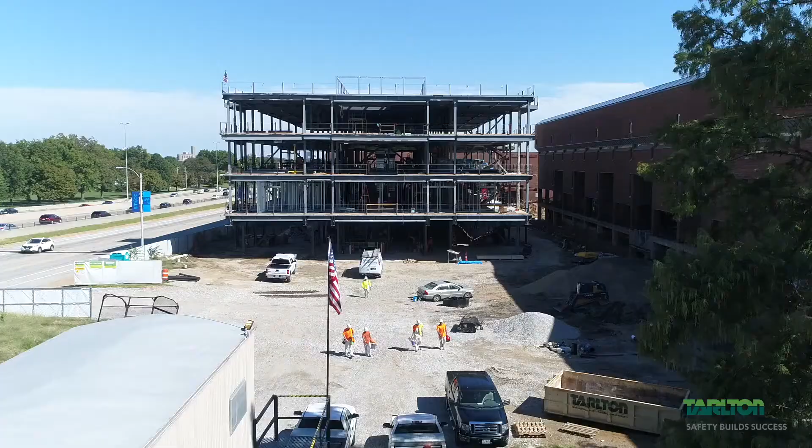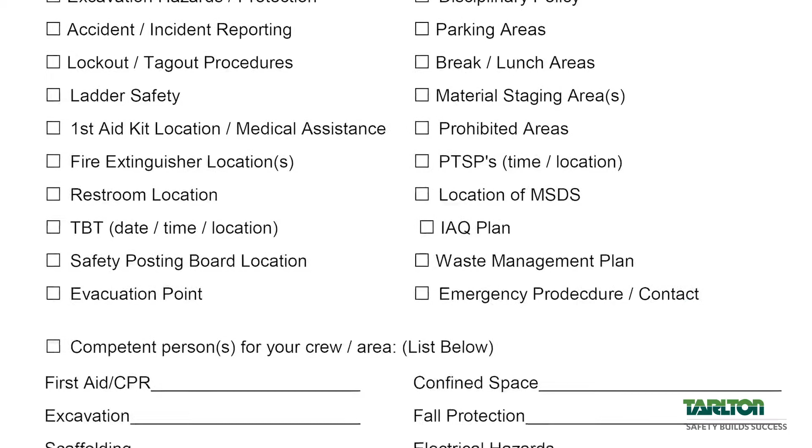Welcome to the St. Louis Zoo Primate Canopy Trails. Here at Tarlton, safety is our number one priority. We believe that everyone should go home the same way they came to work. Tarlton has put in place specific safety guidelines that everyone must follow at all times, which we believe will help us achieve this goal. Please follow along on the checklist and check the boxes as we go to acknowledge training and understanding of all topics. If you have any questions during the video, please ask the project superintendent or a member of the project team.

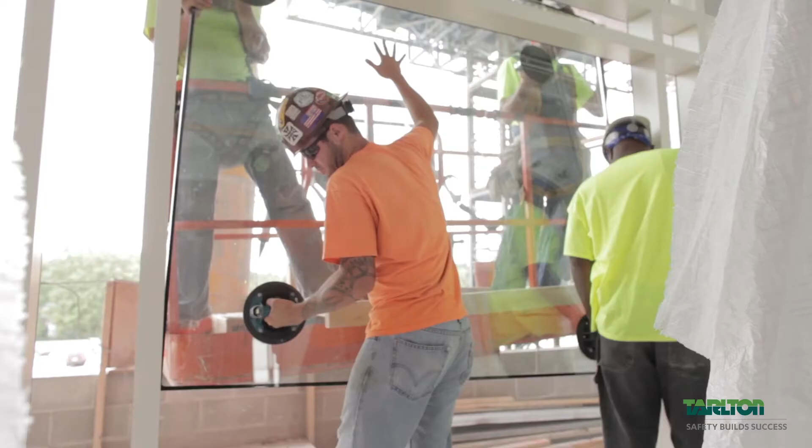All workers must be actively enrolled in the St. Louis Construction Consortium. Drug tests will be conducted for all incidents, at random, and for cause. Toolbox talks will be held Mondays at 12:30 p.m. sharp. All workers are required to attend.

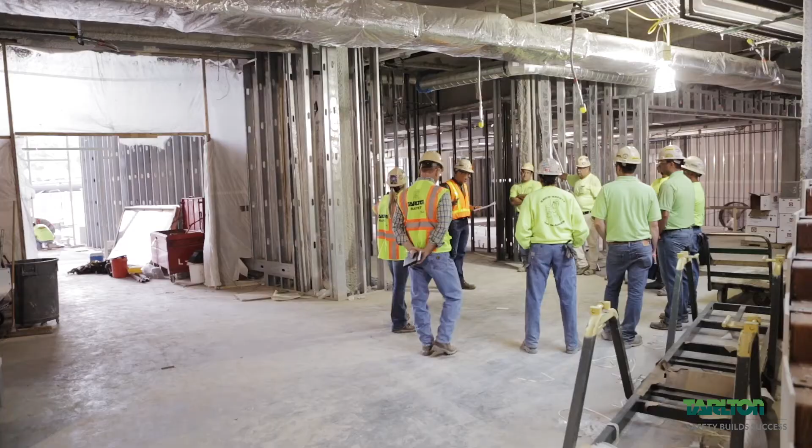All calls for the City of St. Louis Emergency Services will originate from the Zoo Rangers. Never call 911. All medical and fire emergency notifications should go through 314-781-0900, extension 2222.

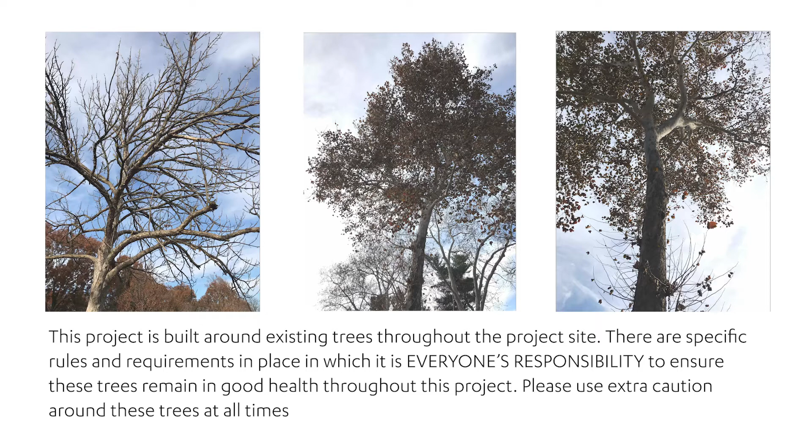This project is built around existing trees throughout the project site. There are specific rules and requirements in place in which it is everyone's responsibility to ensure these trees remain in good health throughout this project. Please use extra caution around these trees at all times.

All gates should be kept closed unless someone is actively monitoring them. This is a USDA federal requirement for animal containment purposes, and violations are strictly enforced.

Pictures for non-work purposes are not allowed in non-public areas. Any pictures for work that include animals or zoo staff taken from non-public areas, anywhere within the construction zone, primate house, behind the scenes, etc., must be cleared by a zoo representative and are not allowed to be posted on any social media platform. The nearest hospital is Barnes Jewish.

The nearest healthcare clinic is Concentra Midtown. The St. Louis Zoo is a tobacco-free campus, and no smoking or tobacco use is allowed on the property. Food or drink is to be contained to the designated break area appointed by the Tarlton Site Superintendent.

Tarlton's Site Superintendent is Jeff Peterson. He can be reached at 317-437-6643.

Temporary facilities will be available on the site. Use of existing facilities is not permitted. All trade and subcontractor parking is available on the east side of the south parking lot. Parking on the project site is not permitted. The evacuation point will be the south parking lot.

All deliveries must be coordinated with the Tarlton Superintendent at least 48 hours in advance. Space on site is limited, and any uncoordinated deliveries will be sent away.

Workers should immediately report unsafe conditions to their supervisor. No worker will be required or knowingly permitted to work in an unsafe area unless the work involved is to correct the hazard, and then only after all safety precautions are implemented.

Workers will always report fit for duty. Intoxicating beverages or narcotics are prohibited on the premises. Do not come to work under the influence of alcohol or drugs. Firearms or any type of explosive are not permitted on zoo grounds, including parking lots.

Fighting, horseplay, practical jokes, or unprofessional behavior will not be tolerated. Anyone found to be willingly damaging or defacing zoo property will be prosecuted. Threatening or abusive language directed at fellow employees, supervisors, zoo representatives, or zoo visitors is prohibited and grounds for removal from the property. Gambling on zoo property is prohibited.

Posting notices not approved by zoo officials is prohibited. Any and all discrimination or harassment will not be tolerated and will be cause for removal from zoo grounds. All incidents must be reported immediately to contractor management or zoo representatives. Theft of any nature or form is cause for immediate removal from zoo property and will result in prosecution.

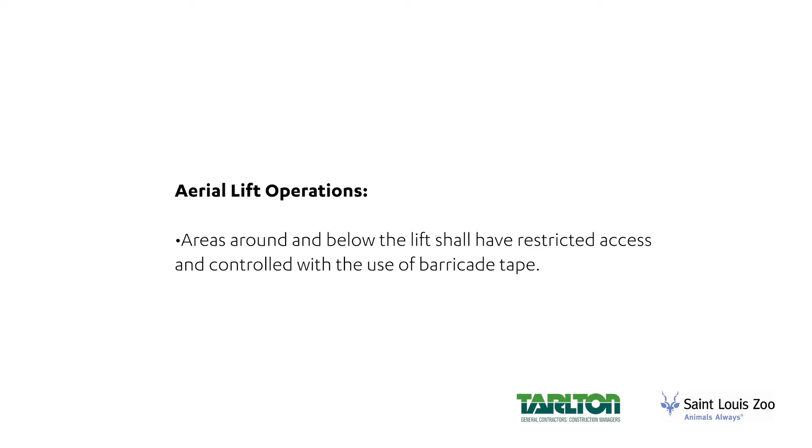The St. Louis Zoo has a specific contractor safety handbook in which all employees on site are expected to read and abide by. Aerial lift operations: areas around and below the lift shall have restricted access and controlled with the use of barricade tape. Fall protection: pits, trenches, and floor openings shall be barricaded with approved fencing and covers.

Fire protection: both the person conducting the flame or spark producing activity and the fire watches must have a fire extinguisher at the ready. Flagging off the area around and below the flame or spark producing operation is mandatory.

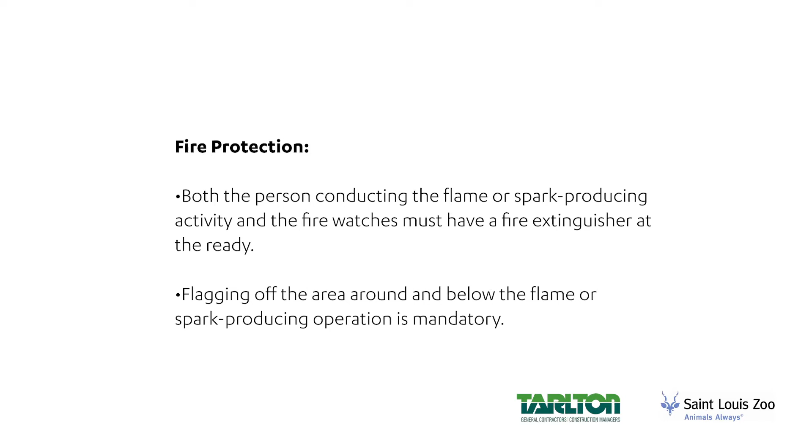Hazard communication. The contractor project management will maintain a current inventory of all materials. The safety data sheets will be maintained at the Tarlton site office. Subcontractors shall maintain a safety data sheet file for all hazardous materials they bring on site. Copies will be sent to the general contractor.

Operating equipment and vehicles. Your company must supply written training verification for all fork truck operations and aerial lifts. Overhead work. All overhead work must be flagged off, or a ground person will be stationed in the area of the overhead work.

Rigging. No load shall be moved above employees. A ground spotter must be used to notify employees in the path of the load. Sounding of a horn is not allowed.

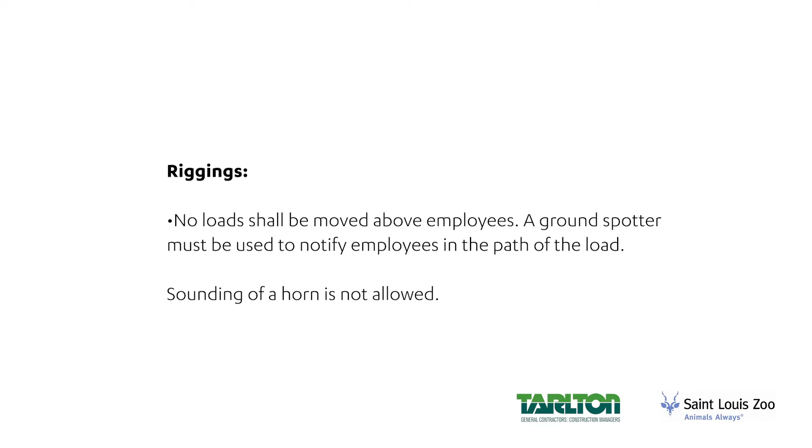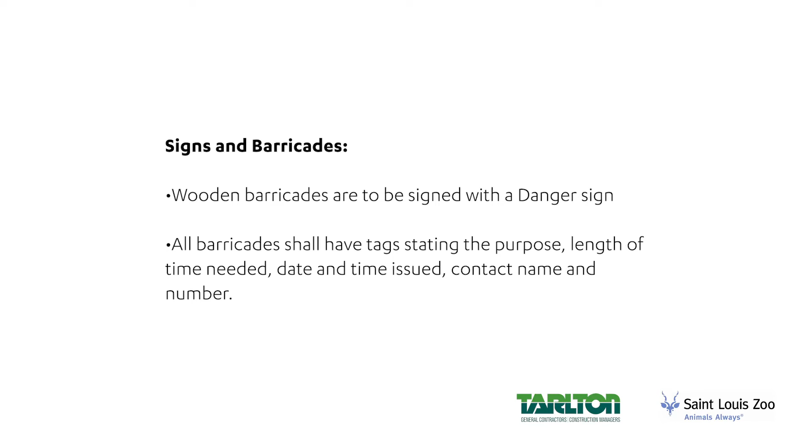Signs and barricades. Wooden barricades are to be signed with a danger sign. All barricades shall have tags stating the purpose, length of time needed, date and time issued, and contact name and phone number. Welding, cutting, burning, hot work permits. Welding at eye level shall be shielded to protect employees from welding arcs.

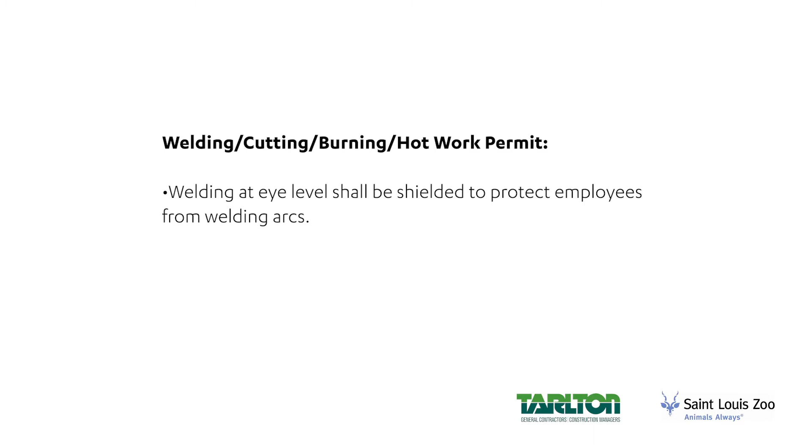Tarlton has a 100% PPE policy. The minimum PPE must be worn on site at all times. The minimum PPE is a hard hat, brim forward, safety glasses, high-vis outerwear, and sturdy work boots. Gloves are required when handling sharp or rough objects or any task that may result in a laceration. These are the minimum requirements, and additional PPE may be needed depending on the task.

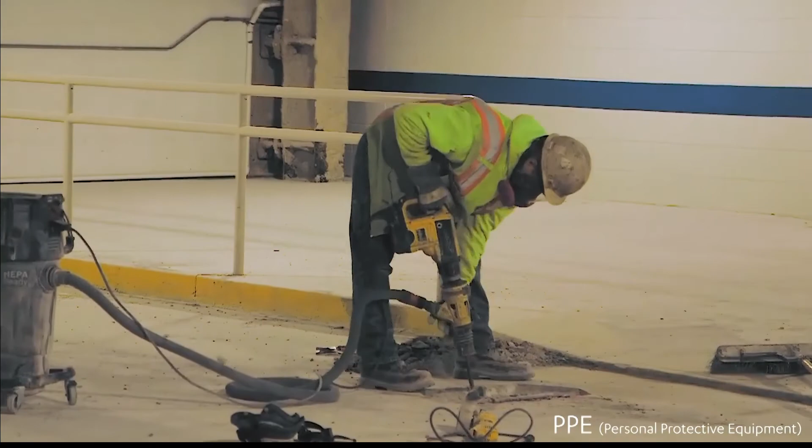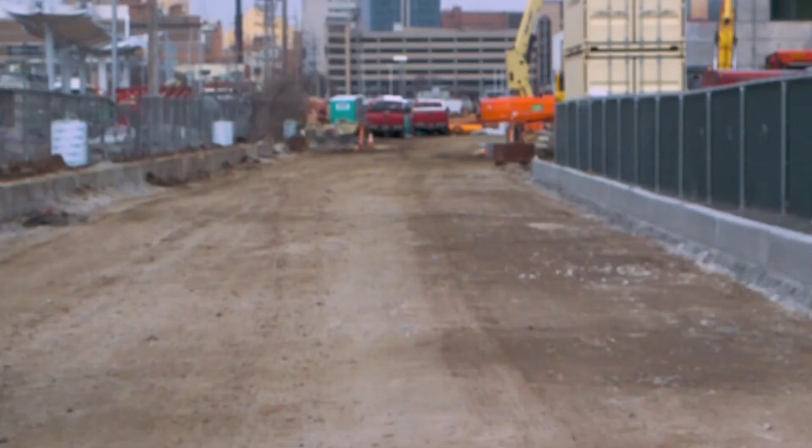Additional PPE may include face shields and/or goggles, hearing protection, plugs and/or muffs, respirators or self-contained breathing apparatus, gloves, reflective vests, Tyvek suits, rain suits, knee pads, metatarsal guards, fall protection, harnesses, and lanyards. Additional PPE required for work being performed will be identified on the daily PTSP.

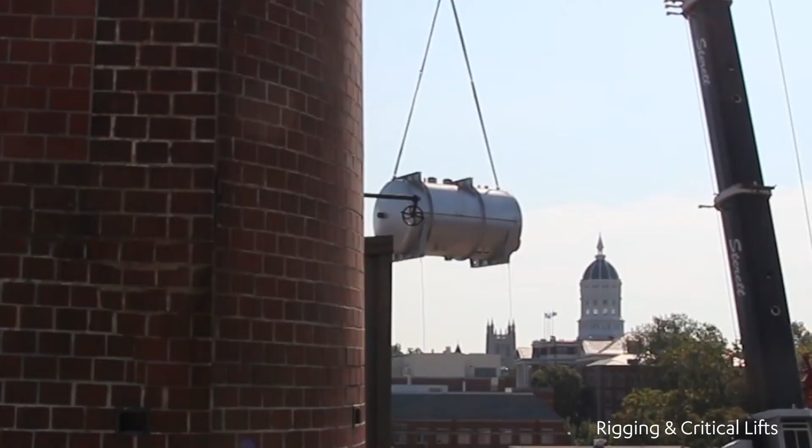Any employee or subcontractor engaged in a rigging activity on the job site must be a certified rigger. Also, any person signaling a crane must be a certified signal person. These employees must show proof of their certification. All weights of loads must be known before hoisting the material, and all rigging must be inspected before use.

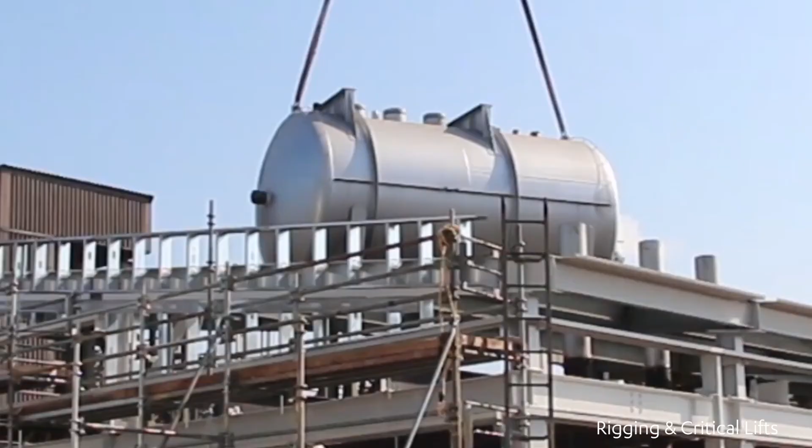If there is a critical lift on site, a critical lift permit must be completed and a critical lift meeting conducted before the lift is made.

All subcontractors must provide a competent person or foreman with minimum OSHA 30 certification on site at all times. All crews must complete a job safety analysis, job safety and health analysis, or pre-task safety plan before each day of work begins. If your company does not have a system, Tarlton will supply a subcontractor pre-task safety plan form for your crew to complete every day.

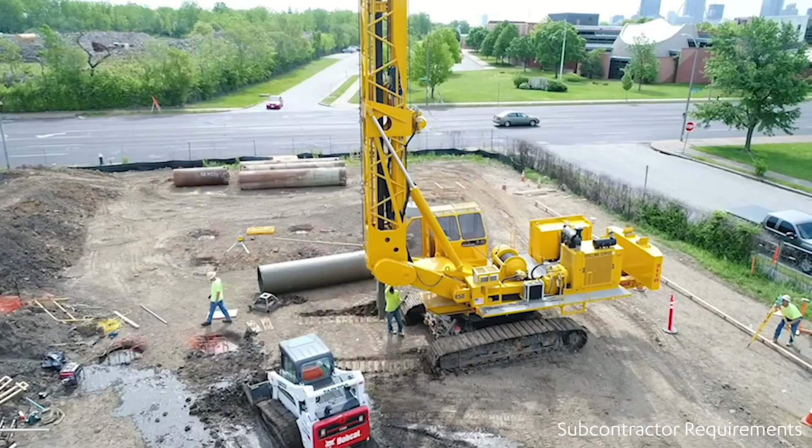Any critical lift, task, or demo will need to have a pre-task safety plan submitted to Tarlton ahead of the task for review and coordination with the superintendent.

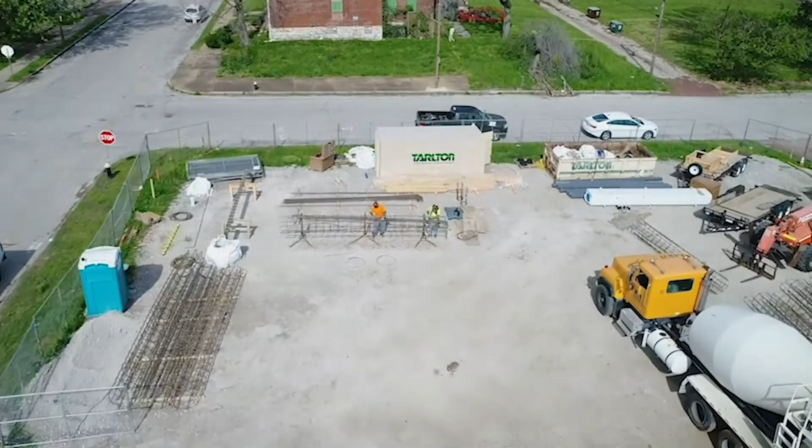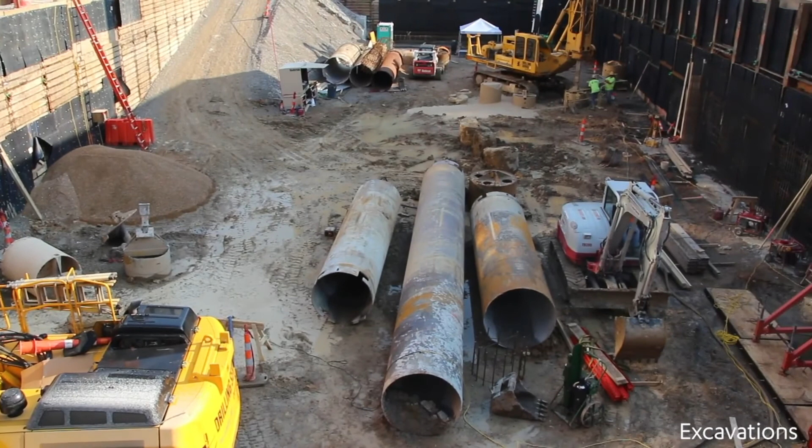Any excavation must be completed under the direction of a competent person. The competent person must inspect the excavations, the adjacent areas, and protective systems daily for evidence of a situation that could result in possible cave-ins, indications of failure of protective systems, hazardous atmospheres, or other hazardous conditions. An inspection must be conducted prior to the start of work and throughout the shift. An inspection must also be conducted after any rainstorm or other hazard-causing occurrence.

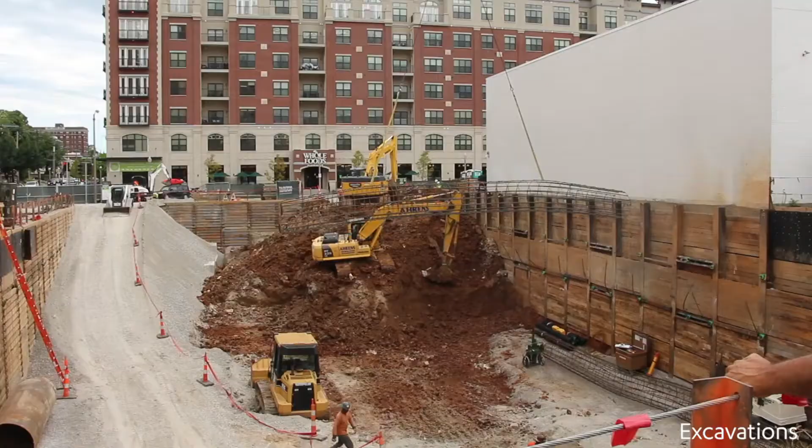Safe access must be provided in all excavations 4 feet or deeper, no more than 25 feet for an employee. Protective systems, sloping, shoring, benching, or shielding must be used in all excavations 5 feet or deeper. Previously disturbed soil must be considered Class C, and Class C soil cannot be benched. Protective systems for excavations 20 feet or deeper must be designed by a registered professional engineer.

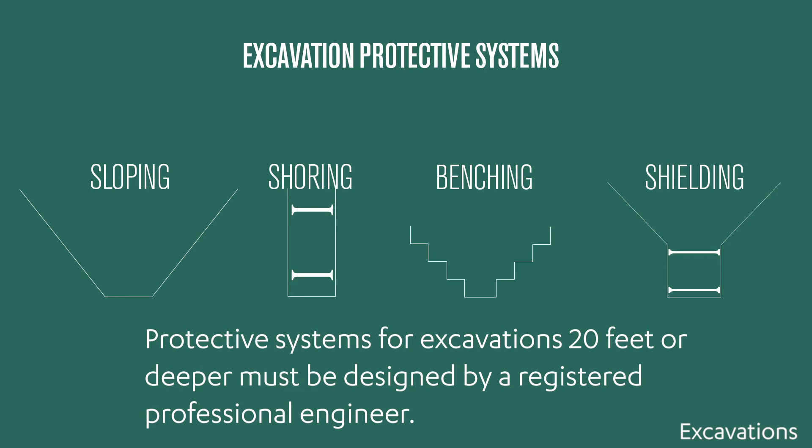If a hazardous atmosphere may be present, air monitoring must be conducted and a confined space permit completed.

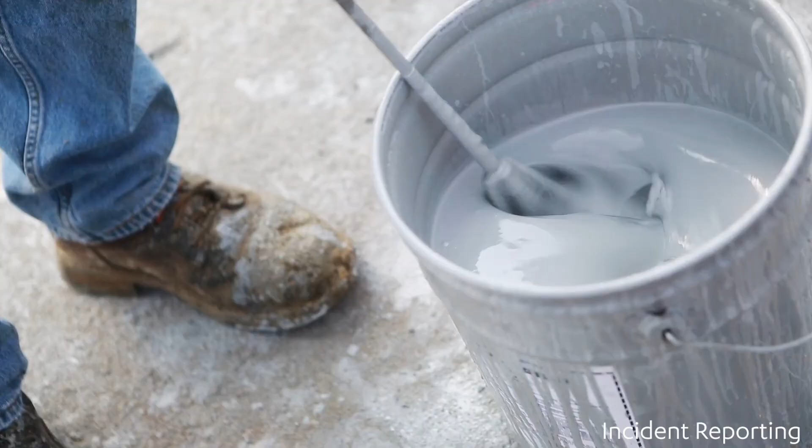All accidents, incidents, near misses, or good catches must be reported to Tarlton's superintendent or a project team member immediately, no matter the severity of the incident. A final incident report should be submitted to the project within 24 hours of the occurrence.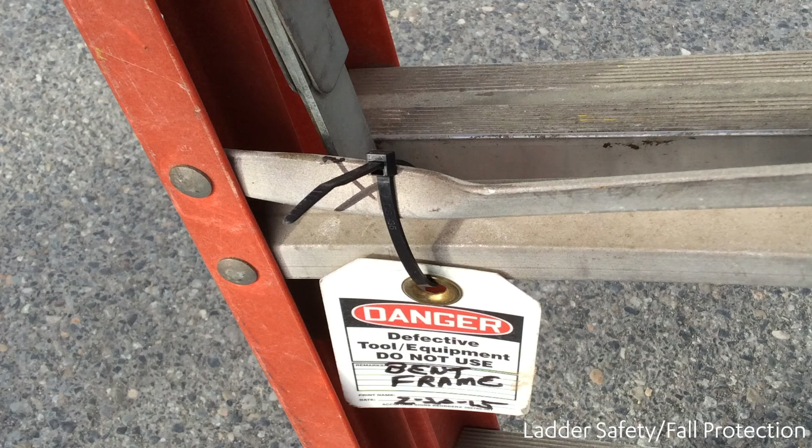Any scaffold must be inspected prior to use, be full decked, and include a full guardrail system. All ladders should be stored laying down unless secured in an upright position. Before each use, the ladder must be inspected for defects. If any defect is found, the ladder must be removed from service immediately.

The top 2 steps of a stepladder cannot be used to stand or sit on. Stepladders must be set up on a stable surface with the spreader bar in the locked position. Stepladders may not be used in the leaning position.

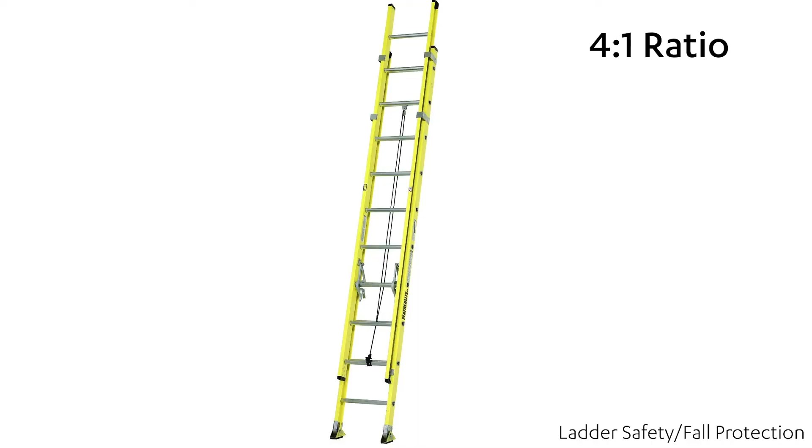Extension ladders must be set up at a 4-to-1 ratio, secured from movement at the top and bottom and 3 feet above any access area. Access to the ladder should remain free of any obstruction. Any job-built ladders must be built in accordance to the ANSI standards.

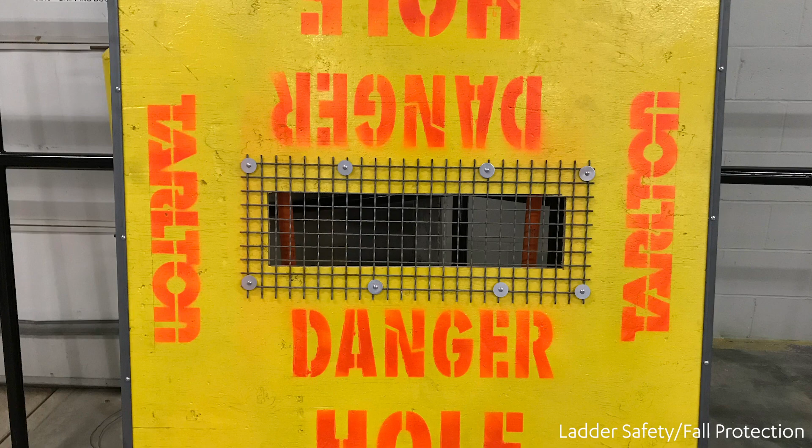If an employee or subcontractor is exposed to a fall hazard over 6 feet on any Tarlton project, fall protection must be used. All floor holes greater than 2 inches must have a floor hole cover installed that is capable of supporting 2 times the maximum intended load, secured from movement, and marked Danger Hole.